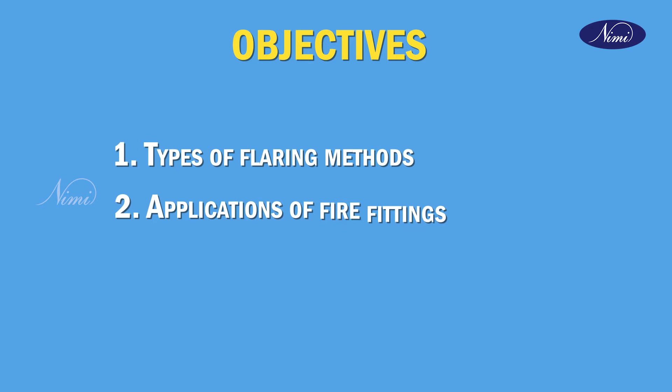Today we are going to discuss pipe flaring. At the end of this class, you shall be able to state the types of flaring methods, the applications of flaring fittings, and pressurize the joint system to conduct tests for leaks.

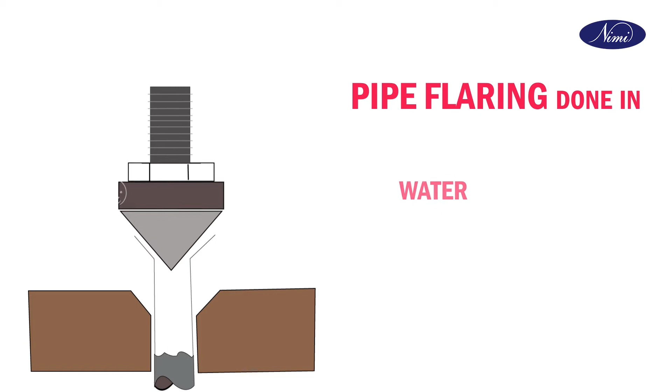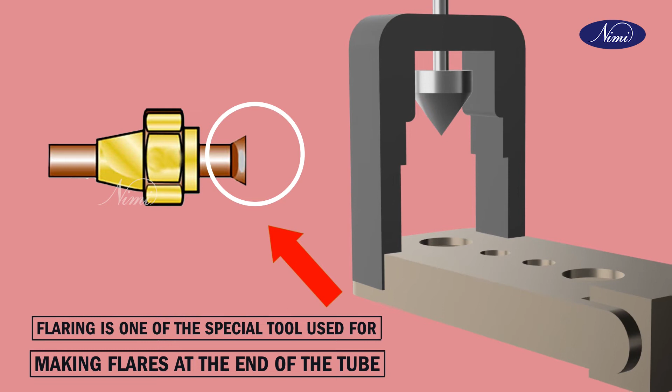Students, pipe flaring will be done on water flowing pipes, gas distribution pipes and copper pipes. Now let's see the process of flaring. Flaring is a special tool used for making flares at the end of tubes. The common practice for flaring is to connect the flaring tool at the end of the tube and rotate the knob until the flare is made on the tube. Flaring is done at the end of the tube fittings for a vapor tight seal.

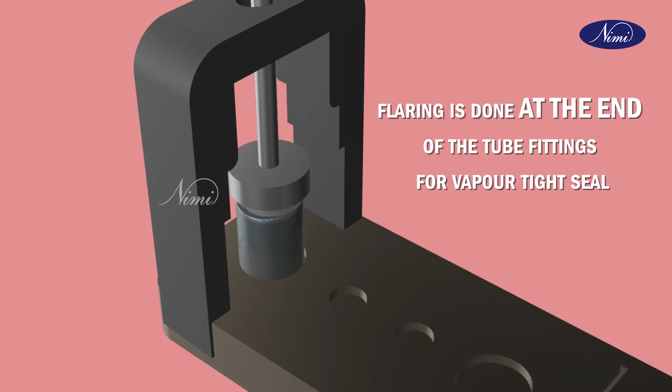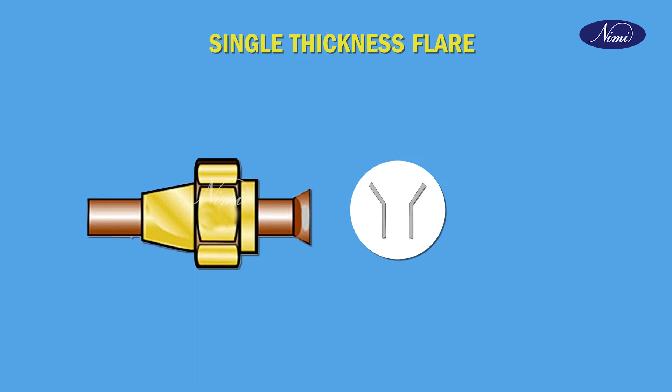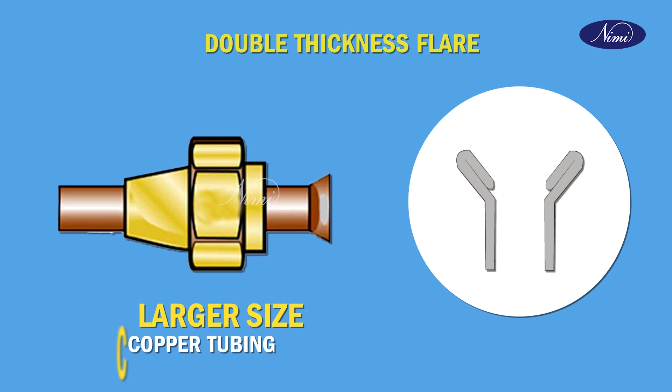Students, flaring is classified into two types: single thickness flare and double thickness flare. Single thickness flare is used for making flares on smaller size copper tubing. Double thickness flare is used for larger size copper tubing, that is 5/16 inch or 8mm outer diameter of the copper tube. The double flare makes a stronger joint than a single flare.

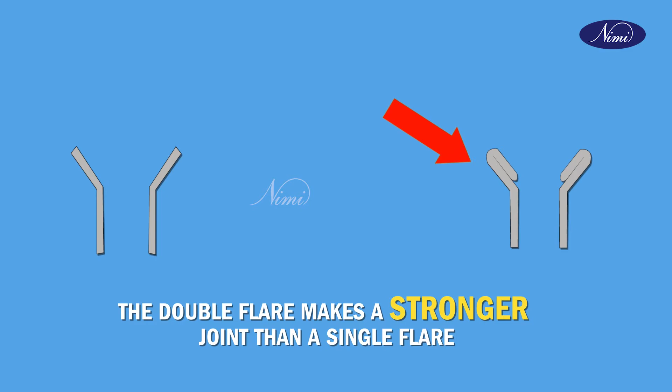The defects of flaring: while fitting the tube in a mismatched position, we can't get proper joints on the end of the tube, so we want to avoid mismatching by proper handling of the tool. In our mechanical sector, we use a lot of metals like copper, brass, bronze, steel and iron. Flare tube fittings are used to attach soft copper pipe fittings.

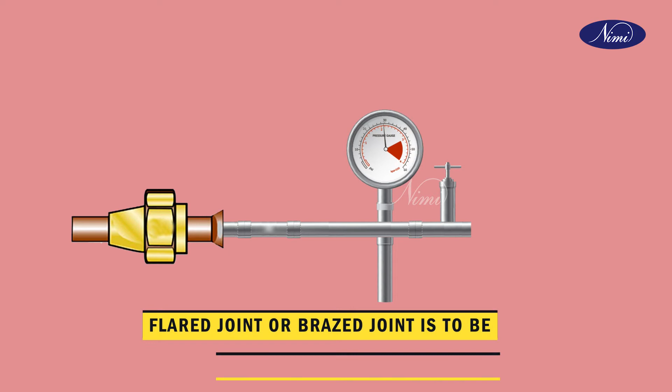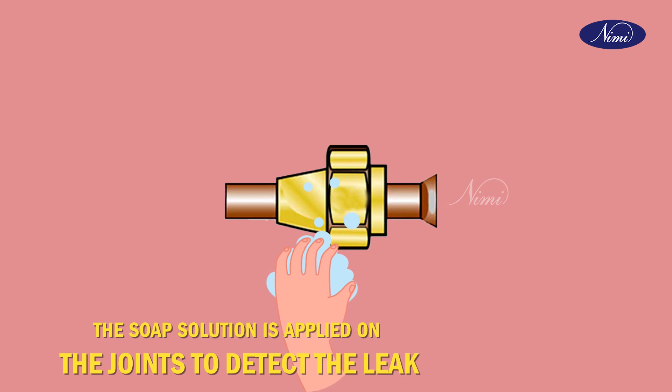Now let us see the testing of joints. A flared joint or brazed joint is to be tested by pressurizing the joints. In the pressurizing test, compressed air of 150 psi or 10 kg per centimeter square is allowed. The specific pressurized gas will be used for testing. Soap solution is applied on the joint to detect leaks. If there is a leak, bubbles will form on the surface.

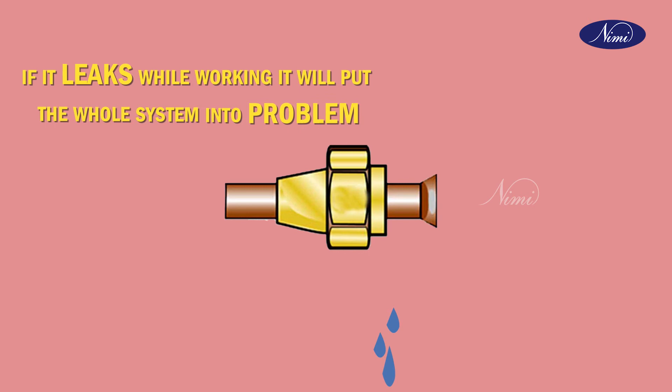Suppose if it leaks while working, it will put the whole system into problem. Pressure tests are usually made on the joints above the working pressure, hence clear the leaks properly.

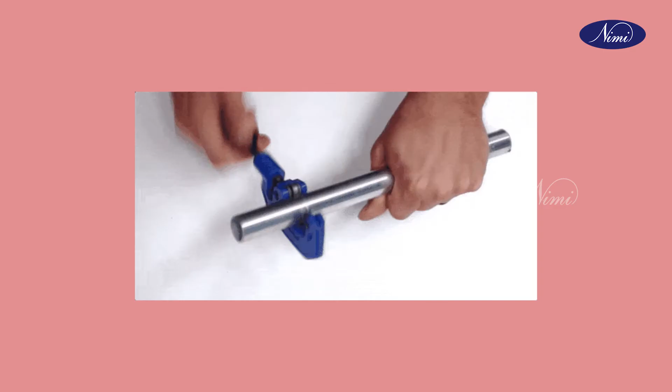Till now we learned about flaring and fitting the flare process. Pipe cutting should be done perfectly to prevent leaks, so we must use the proper tool for cutting the pipes. Here we use a pipe cutter.

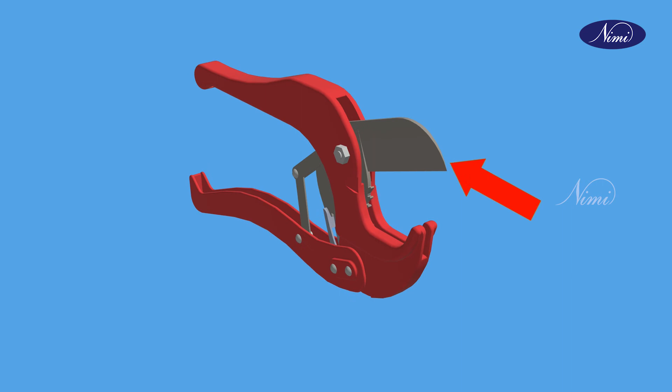Students, so far we discussed pipe flaring, flare fittings and testing the joints. I hope you all understood. Thank you, meet you in the next video.